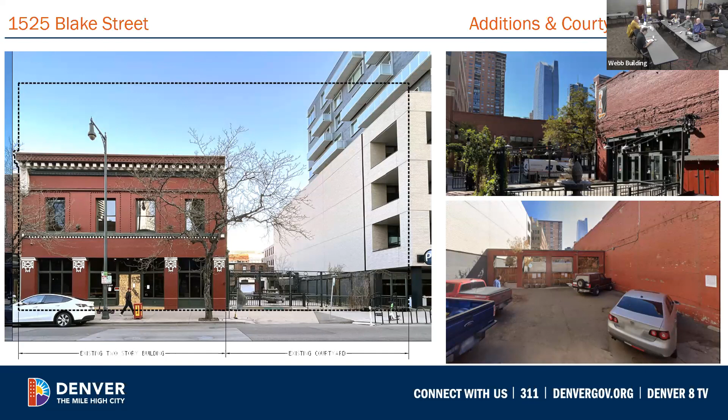Okay, so getting started, the first item that was on the design review was withdrawn. So we will start today with 2023-COA-404 at 1525 Blake Street.

The first application is for additions and alterations to the existing courtyard at 1525 Blake Street, which is a contributing building in the Lower Downtown Historic District. This use has been home to Rio Grande Restaurant for several years, and they used the patio to the north of the site for outdoor dining. They did move to Wazee Street, and since that time it has sat empty. The use will continue to remain as a restaurant use with the new tenant.

So today we're looking at a one-story addition, an elevator stair overrun addition, some outdoor storage space, and some courtyard screening walls. The existing courtyard screening wall, which is a metal rail with a trellis detail above, will be demolished at the front of the site. At the rear of the site, there is a more solid wall separating the courtyard from the parking space behind; that will also be demolished. Then there will be some alterations to the north wall of the historic building. Historically, there was a building adjacent to this building.

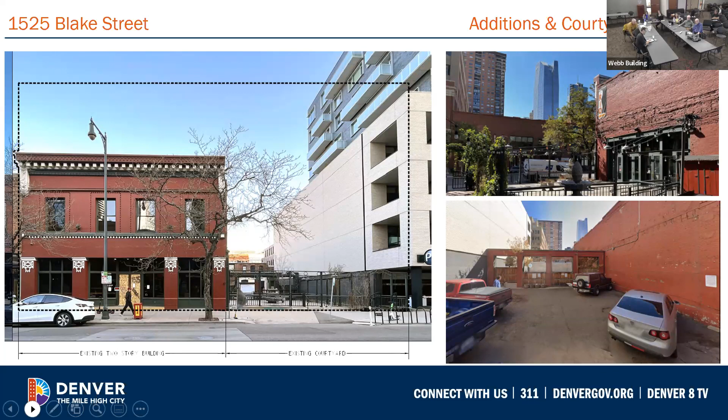Which is just here, and then there is outdoor storage as well off of that elevator addition. That is just open space with no roofing above it. And then you can see alterations to the courtyard that is proposed.

Along the wall with the Sugar Cube building, there will be planter boxes and a fountain feature added. And then a new screen wall vestibule that will allow ADA access into the historic building, as the historic recessed entry is up a step and is not ADA accessible.

To redirect traffic into this building, a new rail will be added into the storefront in front of the historic entry. And then the doors will be fixed, but no other alterations are proposed to the historic entry.

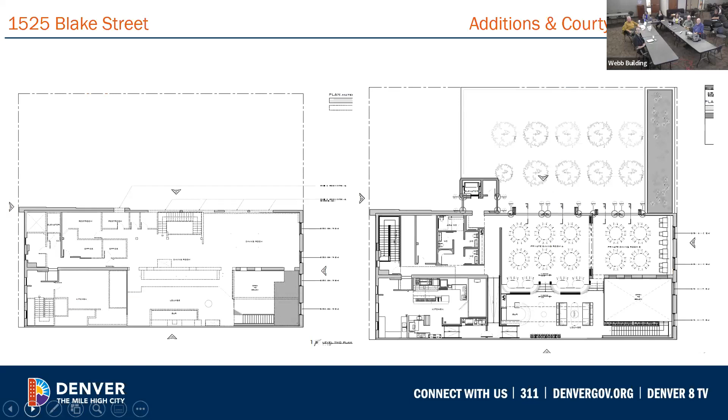Here is the second floor plan. On the second floor, the elevator addition will go up to 2 stories in height. Again, it will have a vestibule space between the historic building and the elevator stair massing.

The vestibule space will have glazing to provide transparency. The elevator will be clad in brick and metal panel as well to create a hyphen and contrast between the structures.

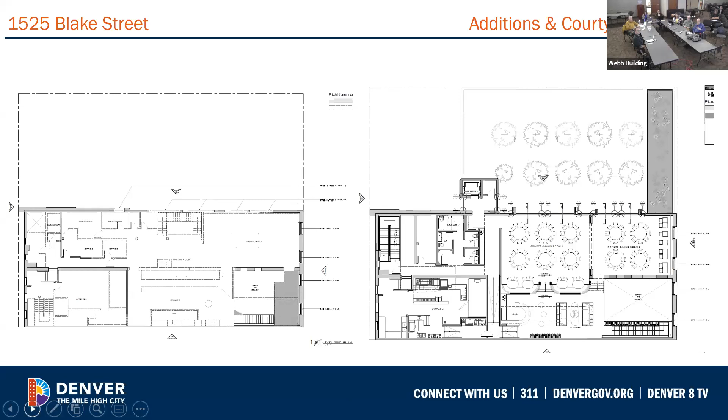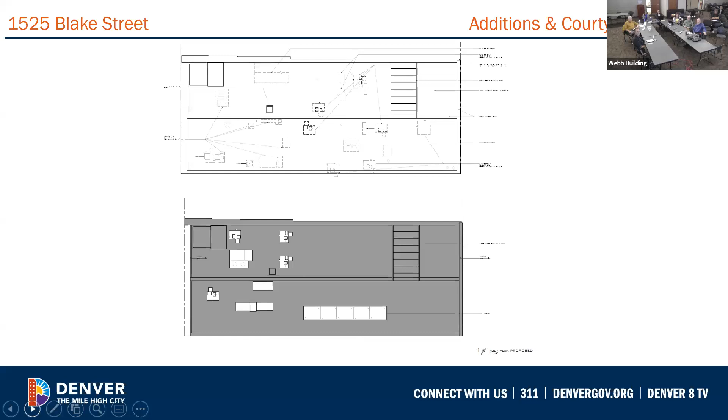Here is the existing and proposed roof plan. The applicant is installing a skylight on the historic building. The skylight placement and location does appear appropriate. However, we do need additional details on the skylight to ensure that it is constructed of high quality materials and not a bubble mounted skylight per our requirements.

The inspiration for the design is the circular motif on the existing historic building parapet, which you can see much better in your board packet. But essentially, this is the inspiration for the circular design and the square patterning.

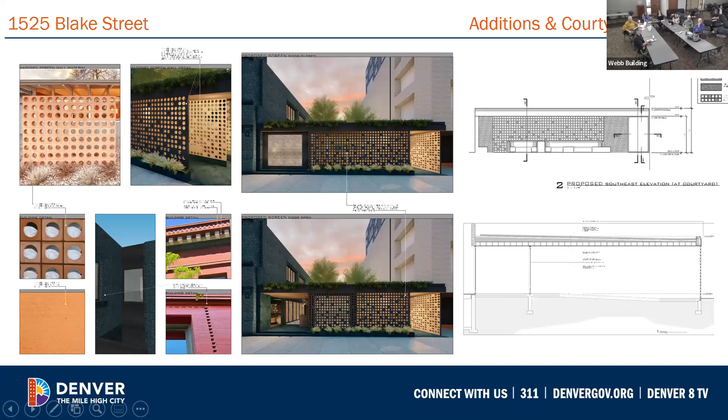These windows will have a detailing similar to the windows on the front facade with this brick banding detail, so that detail will be preserved, but they will be identifiable as new with their precast sills, their size of openings, and their new window operations. So here you can just see that detail of that brick that will be used around those windows there.

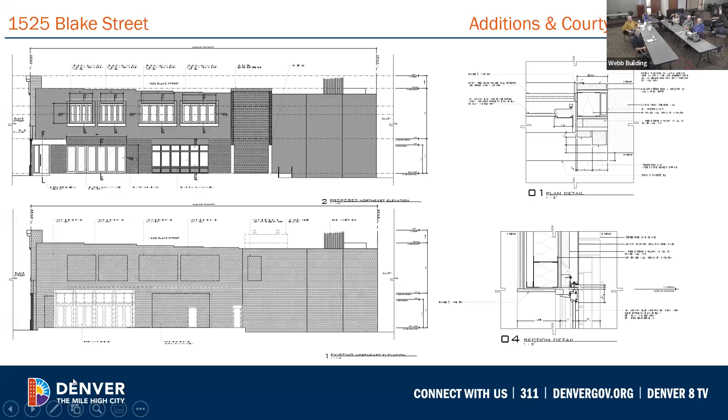This is the elevator addition here, but I have additional elevations to show that better. Here is the proposed alterations to the courtyard. The courtyard will also be repaved with a new concrete paver.

And here you can see that bump out of the proposed one-story bay addition. It is to be clad in metal panel. We're just asking for additional detailing on that metal panel to ensure it's high quality and has a matte finish.

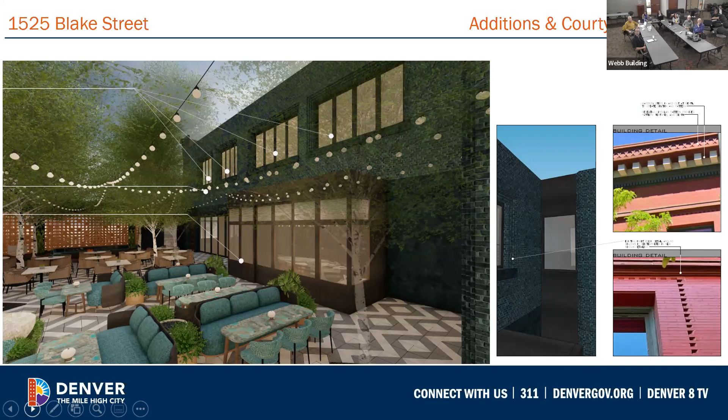And then here you can see that detailing around the new windows as well on the north elevation. There will be planters throughout the courtyard as well to provide some green space on the interior. This is the wall along the Sugar Cube building, so it will have a fountain detail added to it, as you can see here in this elevation and rendering.

That is going to have a lime wash added to it as well. This wall is not existing, but it will be constructed out of brick that is salvaged from the demolition and other salvage brick that matches the existing conditions.

This is just another section here of that outdoor storage space that is open to above, has a cap on it, and then a planter box. Some details of the fountains and planters along the north wall. And then here is the proposed elevator addition.

This is the interior courtyard elevation. So this section here is clad in metal panel, again, asking for additional detail on that. And then this portion here is clad in brick, again, salvage brick to match the existing conditions. It will be painted to match the building. And then we have the outdoor storage space that will have a lime wash on it.

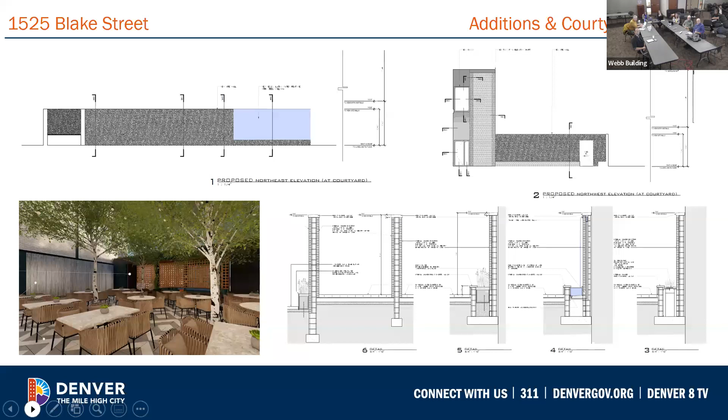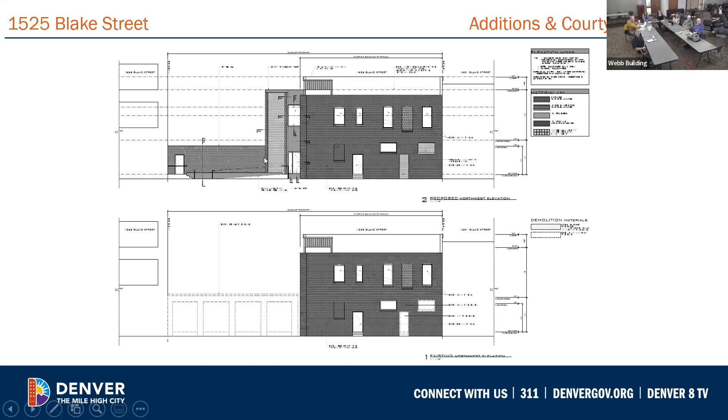Again, this non-historic site wall will be demolished and replaced with this new site wall that also serves as outdoor storage area, new ADA accessible ramp, and again, that elevator addition with the metal panel, hyphen, and glazing, and then the brick configurations.

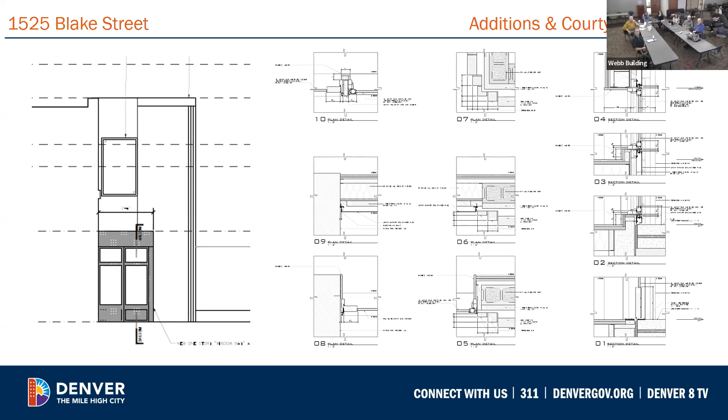And generally speaking, we're just asking for additional information on the skylights and additional information on the architectural metal to ensure the profile and finish complies with guideline 3.6D, which requires traditional application and paneling install and a matte finish.

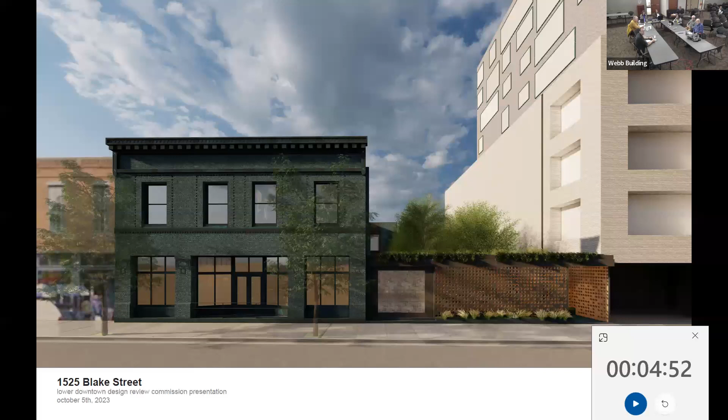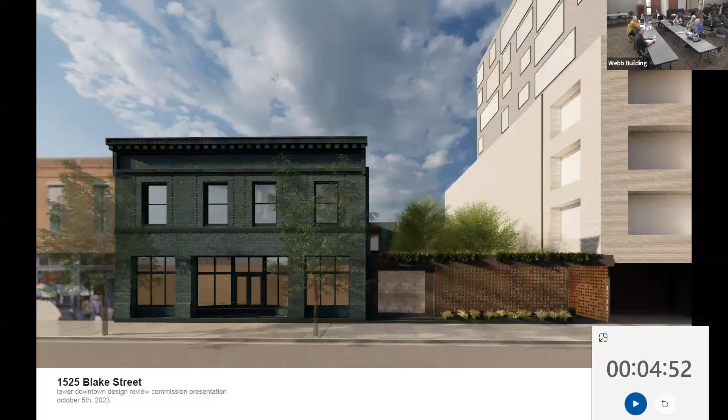Thank you. Is there anybody from the public wishing to comment on this project? If you are joining us virtually, please raise your hand so that we know that you'd like to speak. No hands raised. Anybody in the room wishing to speak?

Okay, at that point we will close the presentation portion of it and start deliberation. What's everybody think? Fred? I think it's a handsome project, and I have a couple of comments that I just want to share, but I don't think they get in the way of my support for the project.

One is that I've thought a lot about the issue of transparency of the courtyard, because my bias is for greater transparency for spaces like that. But I can also understand the excitement and the design element of having a surprise behind a wall essentially. And so I do think the breeze block is probably a good compromise on that and a good balance. But it is something that I've thought about and kind of questioned, turned over in my mind, and I'm sure others have as well.

With regards to the original front door, while I understand staff's suggestion to the applicant to take a lighter touch to it, again, given what happens downtown, I have to wonder if at some point there aren't going to be portable planters placed there to prevent people from sleeping there overnight. So, while I get the reasoning behind the railing and not altering it more significantly, I wonder if practical considerations are going to end up with a different solution once the building's in operation. So I just want to throw that out there.

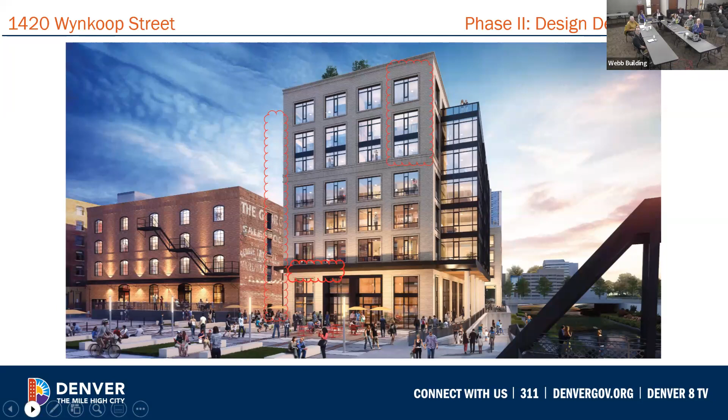It is a little detailed, but I want to cover it as closely as possible. So the applicant will be removing parking level 3. I didn't show that on this slide here, but it is included in your packet. They will be maintaining parking levels 1 and 2.

Additionally, the applicant is proposing to increase the step back from Wazee at the northwest corner from 15 feet 6 inches to 28 feet 8 inches, providing additional visual relief from the historic building at 1430 Wazee Street. I've highlighted it with these squares.

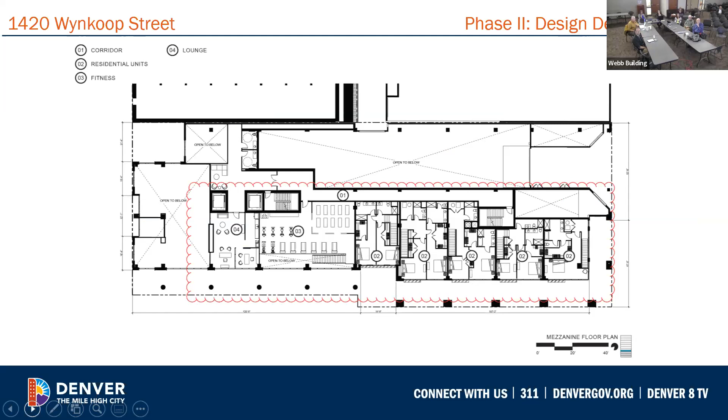So the applicant is also proposing to add a mezzanine level between level 1 and level 3. This increases the overall number of stories from 8 stories to 9, and that has shifted some of the balconies that were in the previous approval.

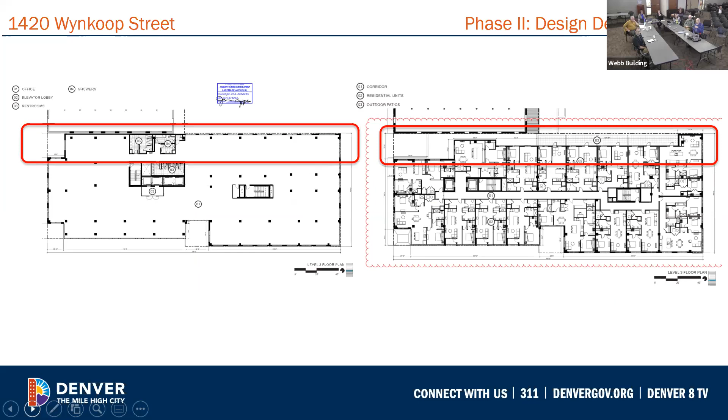Beginning at level 3 and continuing to level 5, the applicant will be stepping the building back from Wynkoop Street at the northwest corner from 28 feet 8 inches to 51 feet 10 inches. The applicant will inset the north wall of the new structure away from the south wall of 1430 Wynkoop Street 5 feet 2 inches for a length of 36 feet 5 inches. And that is here.

The applicant will increase the inset on the north wall an additional 5 feet for a length of 156 feet 3 inches, stepping the building back out, for a width of 9 feet 11 inches at the northeast corner. Staff would like to note that the patio areas shown on the 5th floor of the approved plan set have been moved to the 3rd floor in this proposed plan set, and those can be seen right here.

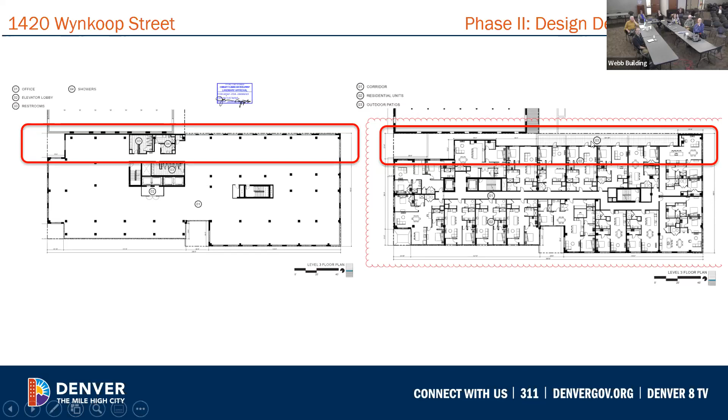Starting at level 6 and continuing to level 8, the applicant will be maintaining the 51 feet 10 inch step back at the northwest corner, and the 5 foot 2 inch inset for a length of 36 feet 5 inches on the north wall, but we'll be increasing the 10-foot 2-inch step back on the north wall for a length of 156 feet 3 inches. That will increase to 157 feet 9 inches here. And then this bump out that's on the lower stories will terminate at the 6th level at a patio.

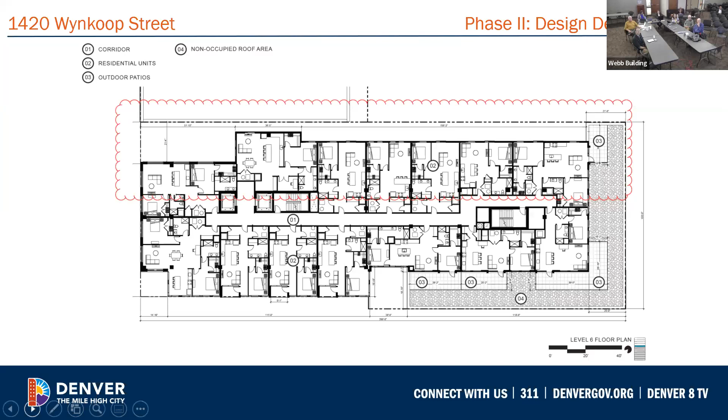Finally, for the floor plans, the applicant is proposing to alter the penthouse portion of the building. So that's level 8 in the approved plan set and level 9 in the proposed plan set.

The west Wynkoop facing wall of the penthouse, this side, will be set back from the front wall of the building 26 feet 4 1/4 inch. The south Cherry Creek side of the penthouse will be set back 15 feet 4 inches, and then we'll recess back further to 15 feet 6 inches, or 16 feet 6 inches on the south wall of the building.

The east Wazee Street facing side of the penthouse will be set back from the east wall of the building 32 feet 7 7/8 inch. And on the north wall here at 1430 Wynkoop, the penthouse will be set back between 9 feet 2 inches to 25 feet 6 inches.

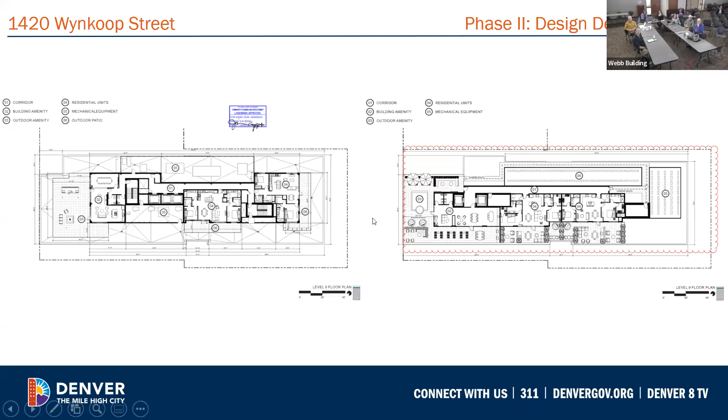Now we'll move on to elevations. The applicant's only making a few minor adjustments to the approved windows at the first floor of the south elevation to better accommodate the mezzanine level in the proposed plan set. So here you can see it's a much shallower window here at the top, but that has been enlarged here to accommodate that mezzanine.

And then they will be adding additional doors at the first floor level to provide patio access for first floor tenants, so those are all right through here and here. But they are maintaining that overall window and door layout, so not much is changing appearance-wise. It's mostly operation that's changing.

The applicant will be adding clear glass Juliet balconies and doors from levels 3 through 8 on the southwest corner. So here, these are all Juliet balconies, and we'll be maintaining the overall proportions that were in the approved plan set, but the operation is changing. They will be using a clear glass balcony rail to minimize visibility.

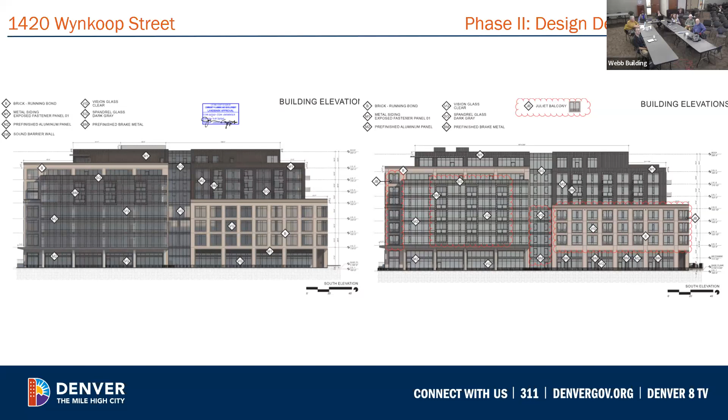Finally, the applicant is proposing to add additional doors and windows on the 9th floor penthouse, so here, and is proposing to extend the canopy on the penthouse roughly 28 feet to the east.

On the east side of the building, the applicant is proposing two changes: the addition of casement windows on levels 3 through 5, and the addition of Juliet balconies and doors on levels 3 through 5. The proposed casement window addition will fit within approved mullion patterns and will not significantly alter the appearance of the previous approval, same as on the other elevations, which I'll cover in a little bit.

The applicant will be adding clear glass Juliet balconies to levels 3 through 5 on the northeast corner of the building, maintaining that overall mullion pattern and opening size to reduce visibility of those alterations. In addition, Juliet balconies and doors will be added to the street facing facade below 55 feet.

A portion of the addition of Juliet balconies, the doors to the street facing facade, is below 55 feet.

That was slightly concerning to staff. However, this portion of the guideline is a preference, not a requirement, so we did have quite a bit of discussion about the addition of the Juliet balconies, especially on these street facing facades, but ultimately determined that they aren't significantly changing the mullion pattern on these openings. The balcony railings will be clear glass, to allow some outdoor space for tenants on these floors.

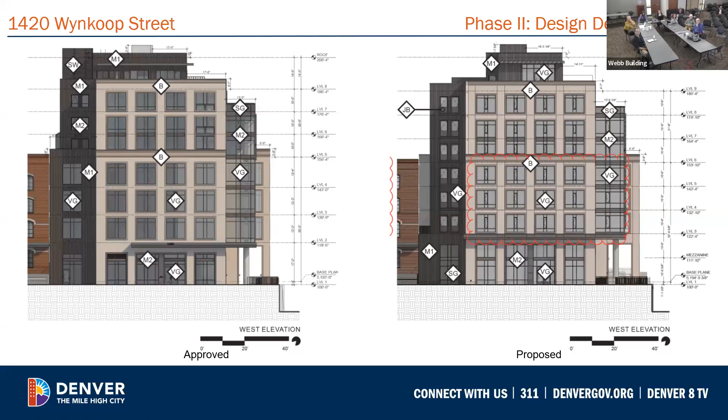At all of these points, the applicant is maintaining that previously approved mullion pattern, so staff didn't see a significant impact on the design.

Here they step it back from these lower levels to this metal portion, where the new step backs are coming in. They'll be increasing the brick portion of the building by 2 bays, so this portion here will be increased from 1 to 3 bays in depth.

The applicant will be adding clear glass Juliet balconies to levels 3 through 8 on the northwest corner of the building, as well as levels 4 through 8 on the main body of the north elevation. On the main body of the elevation, Juliet balconies are added. The applicant will be maintaining the overall mullion pattern on these openings, but will be adding doors with clear glass railings.

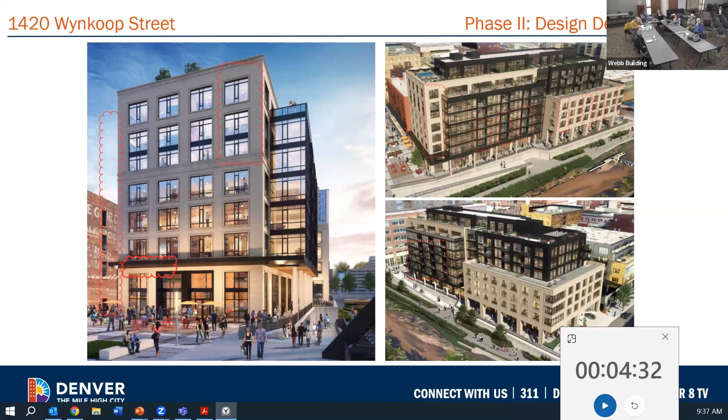Great, thank you, Nate. Does any commission member have questions for the applicant? Okay, I'm not seeing any. Thank you, Nate. Thank you.

Jesse, do we have any staff recap? Okay, do we have something.

So the West End Loft is a contributing building to the historic district, so we would not allow its demolition. But there is a parking structure that serves the West End Loft immediately adjacent to the site that potentially could get demolished. It's highly unlikely, as it serves the parking for these residential uses, but it is only a 25-foot wide lot, so it would likely not be developable to this height.

Thank you, Brittany. Is there any member of the public that wants to speak on this project? Please raise your hand if you're joining us virtually and would like to speak. Okay, not seeing any, and no one here in public.

All right, so we will close that and open for deliberations. Fred, sure, I'll kick off. You look like you have something to say.

I've been contemplating the north elevation, and I understand staff's point, but it is on the property line, and that presents some construction issues, et cetera, that are a challenge. I'm not opposed to the idea of blind openings.

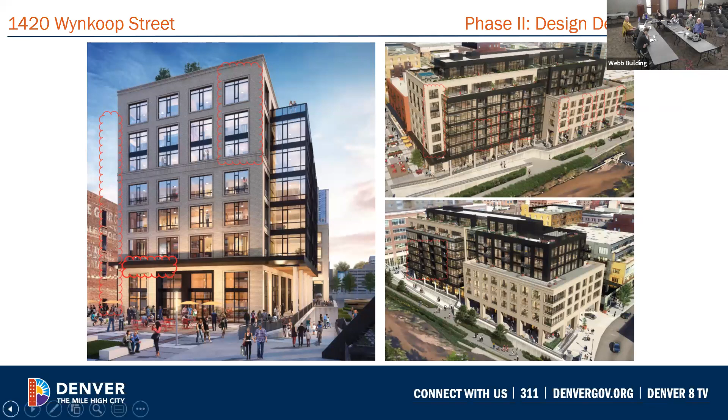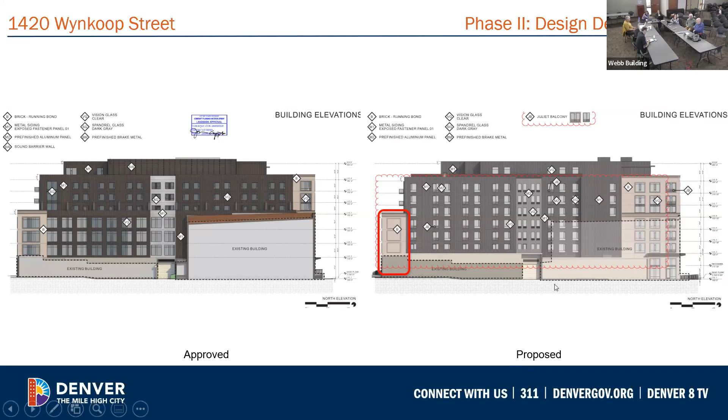One of the things I like about the approved design is that even though that north elevation is not street facing, with that low parking structure, it is still quite visible from the street. In the originally approved plans, there was a continuation of the defined four-story module with the piece on top, and that's very much been lost. It gives a very stark, institutional facade now that feels a lot less appropriate than what was originally approved. But I'm sure some of my colleagues can articulate that a bit better than I just did. Thanks.

I think where I struggle a little bit on the north is, I agree, because of that low one-story parking enclosure, it's gonna be fairly visible, at least the first several bays. I think the further you get towards the middle of the lot, the less visible it will be.

Unless you're standing in the parking garage looking up, I don't think you're gonna see it as much. I feel like the piece with the blind window proportionally feels a little narrow to me, with the same comment, Fred, that the originally reviewed and approved detail had more of a datum that went all the way across, a change in color in the material, but it was still a datum that was there. I think a little bit of that got lost.

I hear the argument about, yes, it's right on the property line, and there are building code issues with windows. I would argue it possibly wouldn't necessarily need to be. On the other side, on the Wynkoop side, they have it 5 feet away from the adjacent property line, so there's a little breathing room and flexibility with building code.

I don't want to design it for them, but looking at the plan, I think if we were to take the mass of that beige brick element and make it a little wider, and extend that datum back a little bit more, they could have some breathing room in their plan to push it away from the facade and introduce some windows again, and have all of that feel a little bit better.